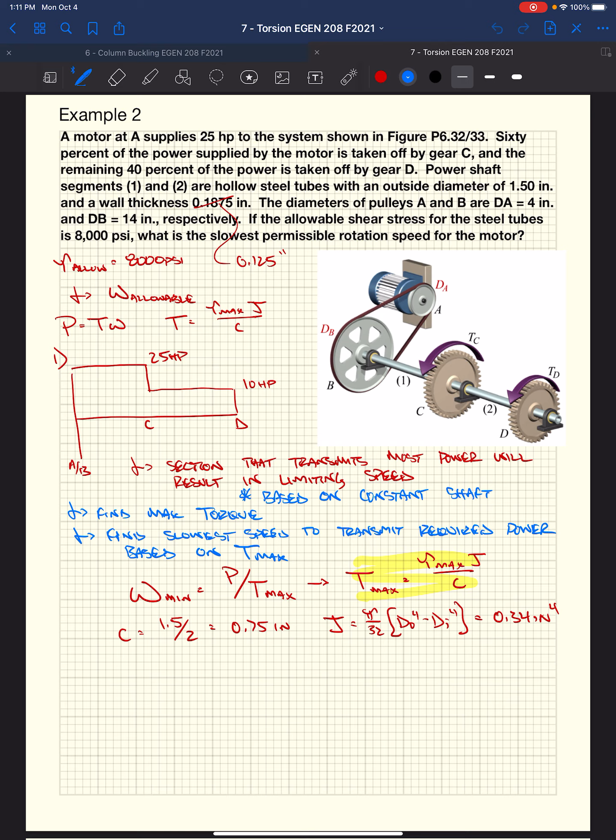Okay, so to pick up where we left off on Friday, we had this motor. It applied 25 horsepower to this shaft system that drives 2 gears. Each of those gears is taking power off of the shaft system. The first gear, gear C, took 60% of the power, or 15 horsepower, and the last gear takes off the remaining 10 horsepower. They asked us, what is the slowest permissible rotation speed for the motor?

So we went through, given our two expressions relating torque. We have our torque to stress relationship, T equals tau max times J over C. And then we have power equals torque times rotational speed, omega. Based on rearranging omega, we can get this equation: power divided by the maximum torque equals the rotational speed.

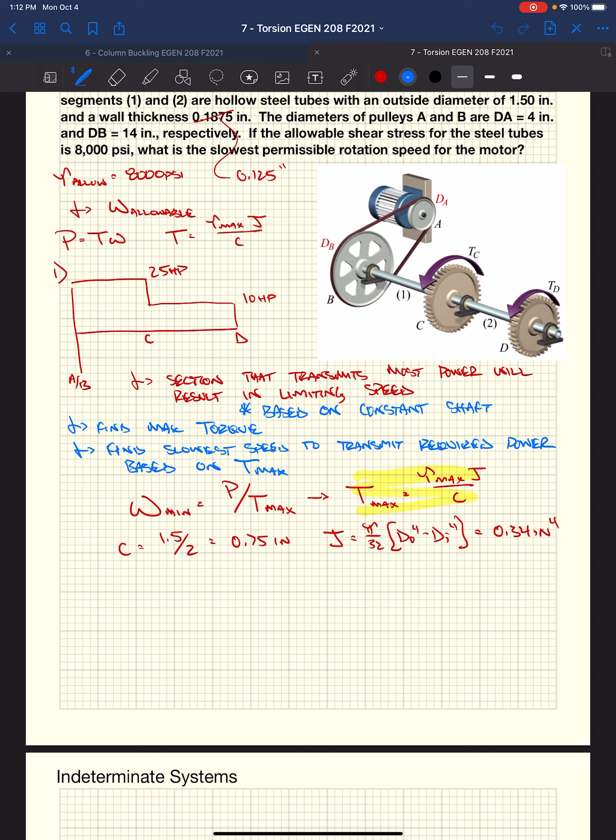Well, if that torque is limited, like in our case, our allowable shear stress for the steel tubes is 8,000 psi. So they're limiting how much torque we can apply to the system. If they're limiting the amount of torque we apply, and we're given the amount of power supplied, we're essentially given a requirement as to the rotational speed.

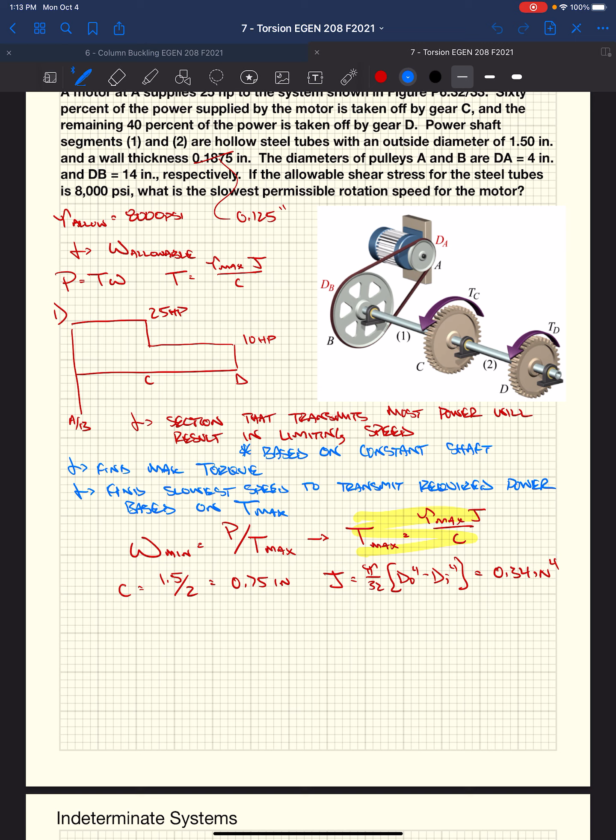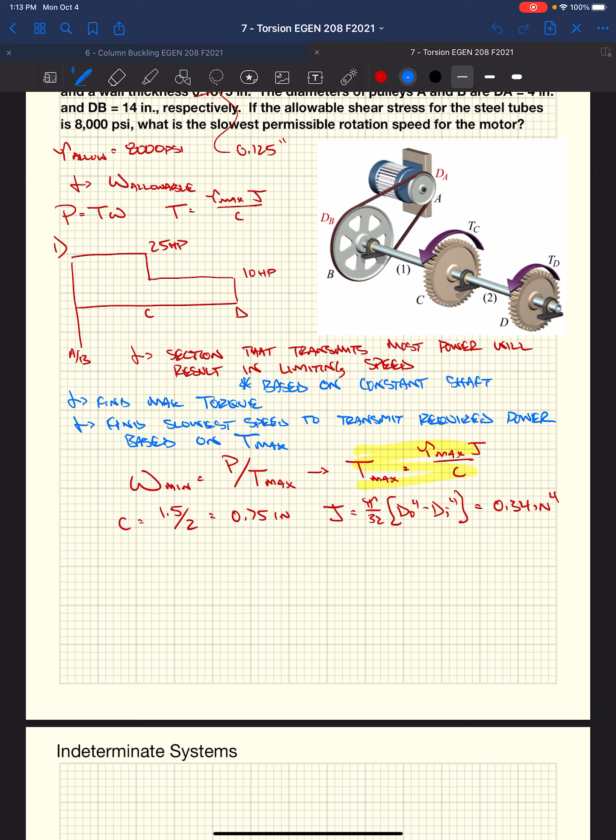What's the slowest permissible? So in order to do that, we need to calculate the maximum torque first, which is our maximum shear stress times the polar moment of inertia divided by the max radius. We calculated max radius and our polar moment of inertia. Now we can go through and calculate what our maximum shear stress or maximum torque is.

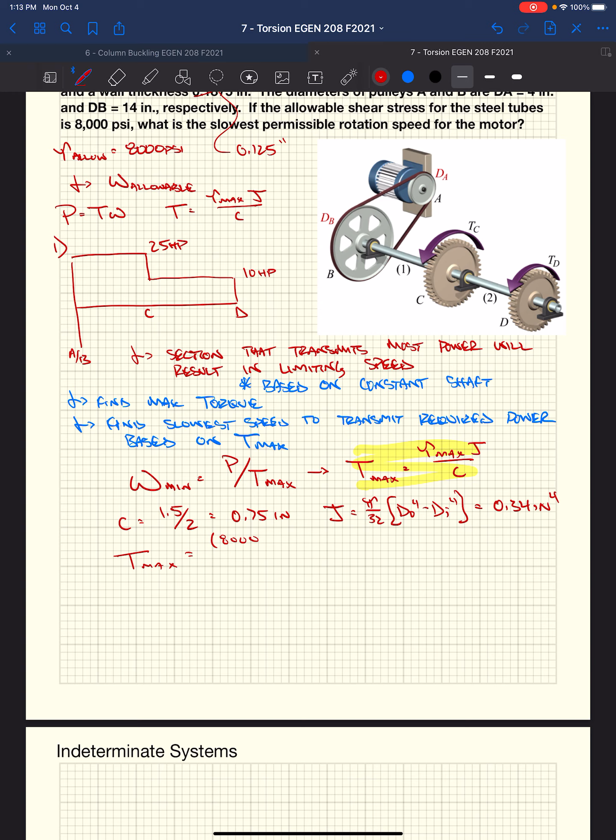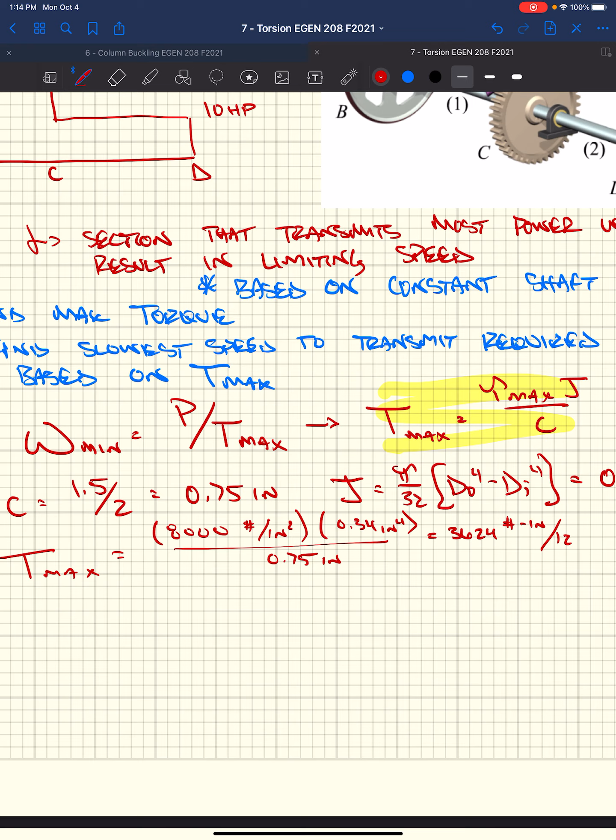8,000 pounds per square inch, times J, which is 0.34 inches to the fourth, all over the radius, 0.75. Our units work out to be 3624 pound-inches. I want to make it feet, so I divide by 12, inches per foot. So we get this max torque equal to 302 pound-feet. Our max torque is 302 foot-pounds.

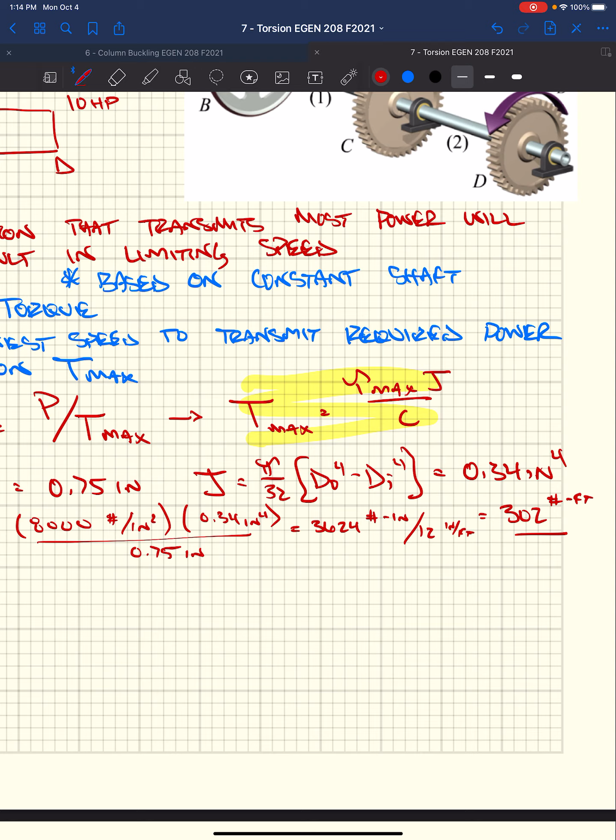Well, now that we have our maximum torque, and we know how much power we need to deliver, we can now calculate our omega equals power over max torque. Power we're given in horsepower. We know there's 550 foot-pounds per second per 1 horsepower. We're going to divide all this by the maximum torque.

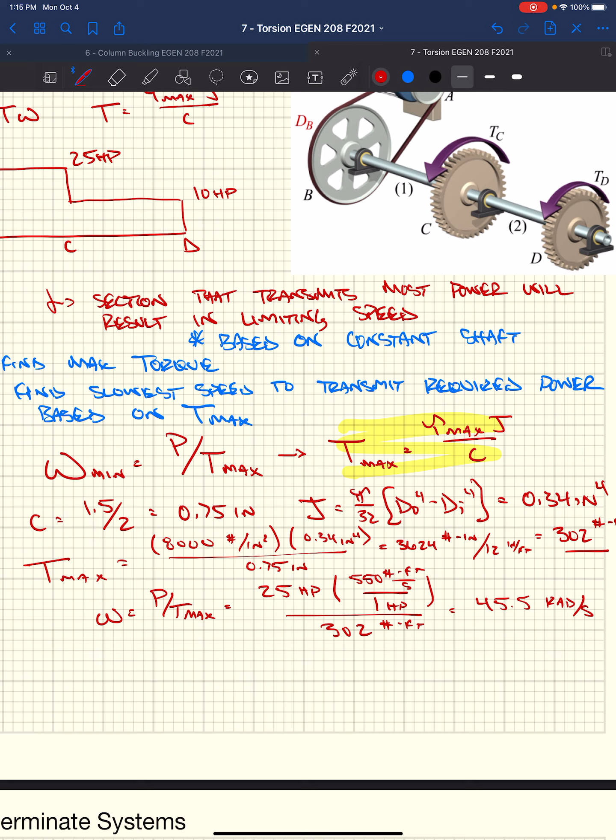And we get our answer in radians per second. Horsepowers cancel, foot-pounds cancel, we get essentially 1 over seconds, unitless over seconds, or radians per second. They wanted to know our revolutions per minute. What is the slowest permissible rotational speed for the motor?

Well, this is the slowest rotational speed for the shaft, because that's what's dealing with torque. And so we've got omega equals 45.5 radians per second. 1 revolution we know is 2 pi radians. We have 60 seconds per minute, and we get our typical rotational speed units of revolutions per minute, or RPM: 435 RPM.

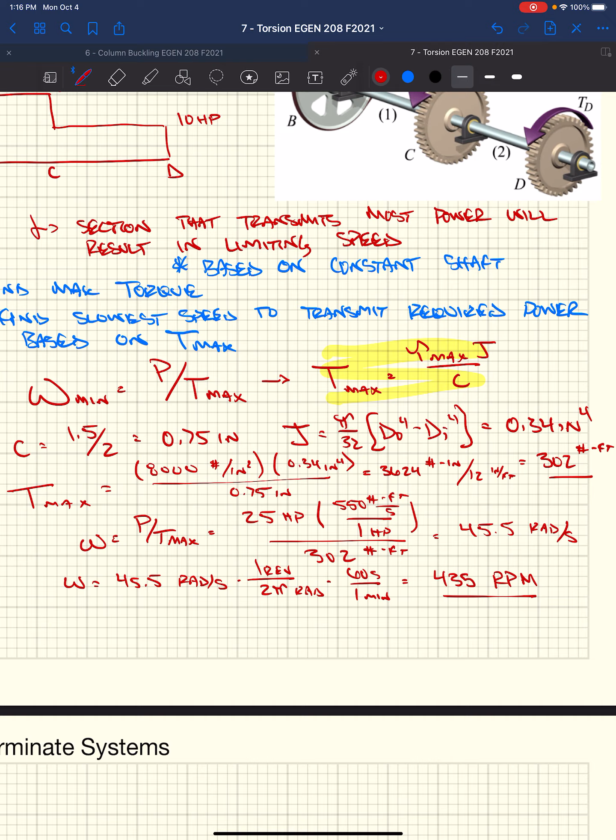So if we want to ensure that we don't exceed the maximum shear stress of the shaft, and we provide enough horsepower, that being 25 horsepower into shaft 1, we've got to rotate this shaft here at 435 RPM in order to get that without exceeding the max torque. But we want to know, how fast does the motor have to spin? Because we have this gear ratio going on here.

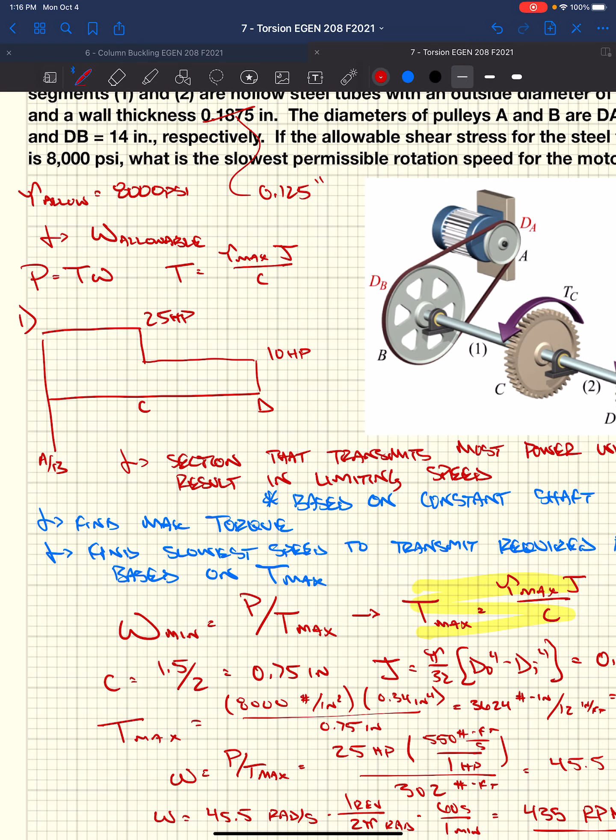Well, the RPM of the motor equals the rotational speed of shaft 1 times our gear ratio. So in our case, with speed, the gear ratio flips. So now we're looking at 435 RPM times the diameter of the shaft's pulley divided by the diameter of the motor's pulley, and we get the RPM of the motor needs to be 1,522 RPM.

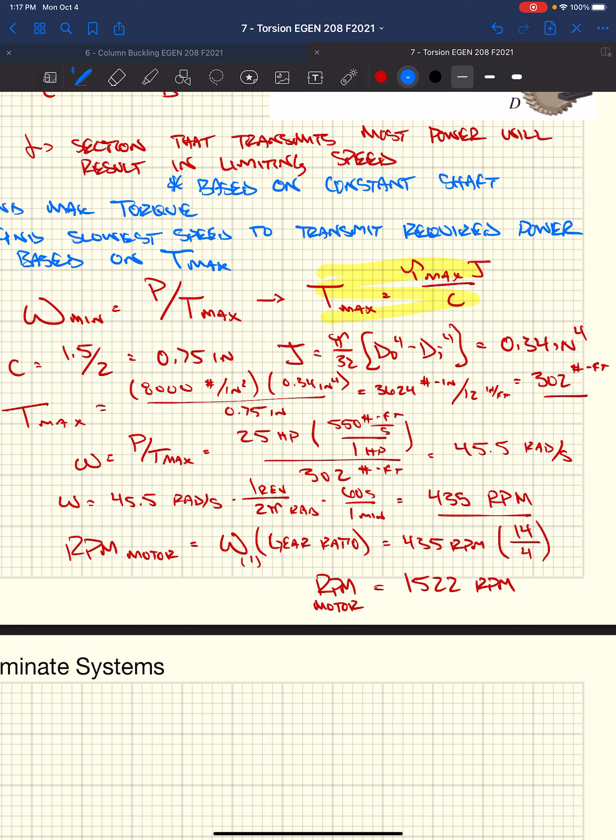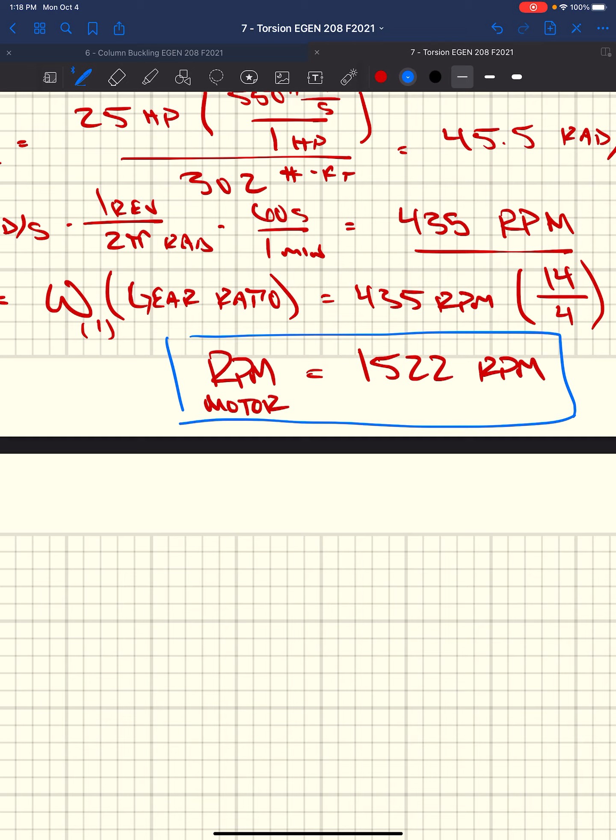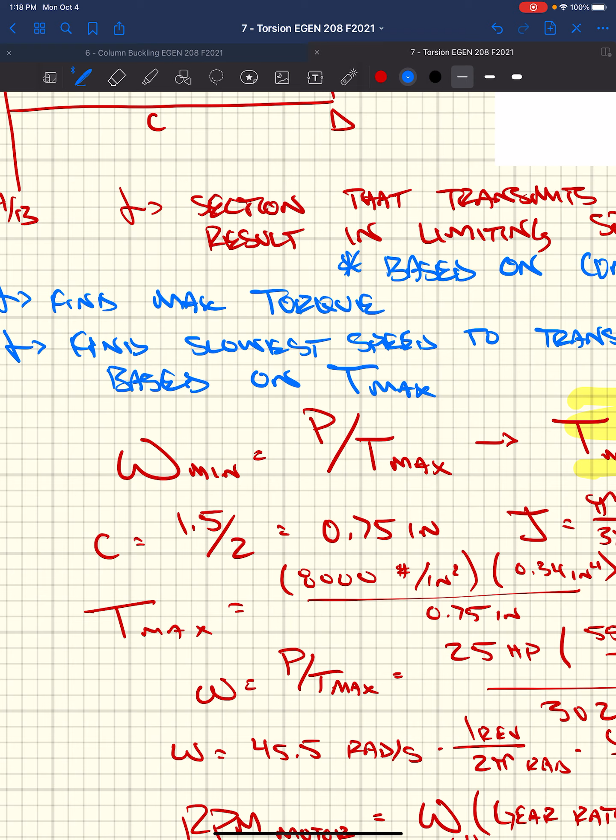Does that make sense? A lot of moving pieces here. Anything less than that, and we're not going to provide the power required.

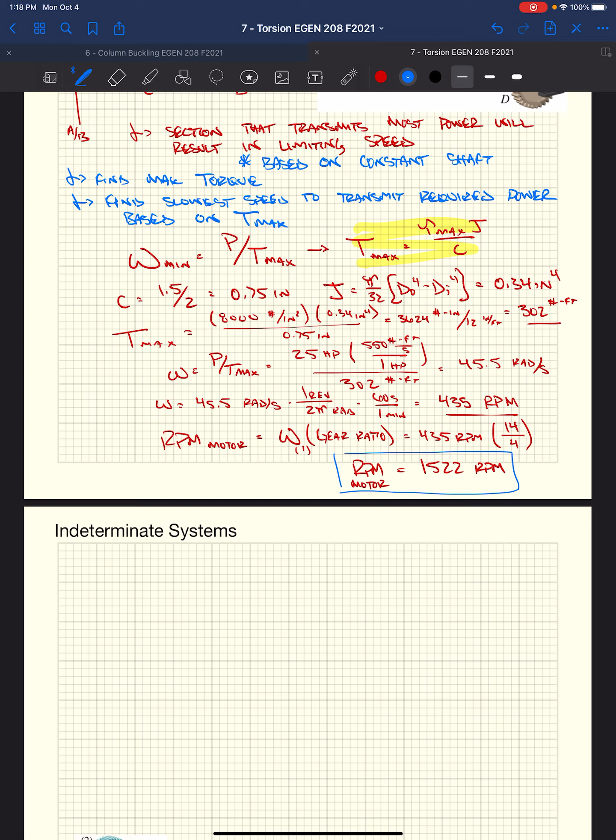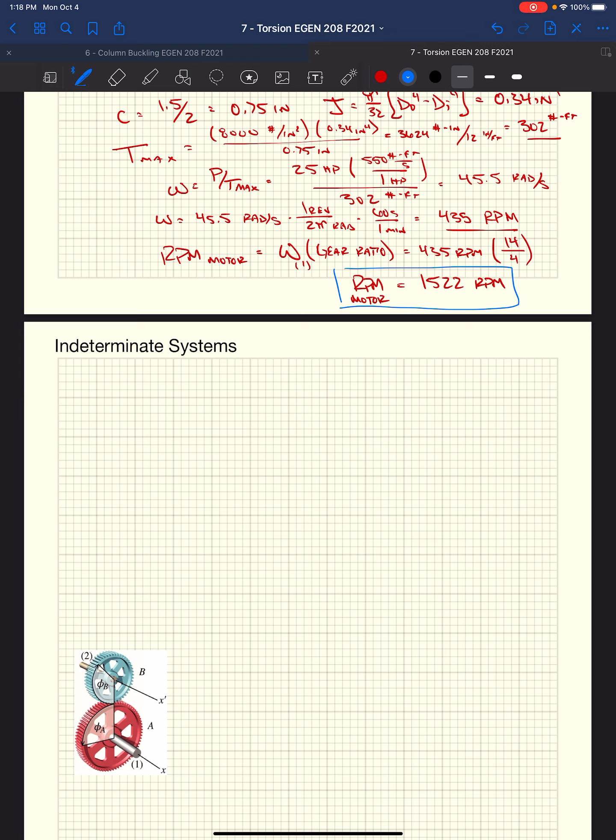Well, just like with axial systems, we have indeterminate systems with respect to torsion too. Indeterminate systems go through a process to devise a solution. But indeterminate just means that there are more unknowns than equations of equilibrium.

Our equations of equilibrium do not allow us to calculate forces when there are more unknowns than equations of equilibrium. We have some of the moments and some of the forces.

If we're looking at true, pure torsion systems, ignoring some of the gravity aspects, we really only have one equation of equilibrium: the sum of the moments along the axis of the shaft. That's where all the forces are acting, along the axis of the shaft. So if we have a system that has two unknowns in it, then we have an indeterminate system. And we determine if it's indeterminate through the same process as we went through with axial forces.

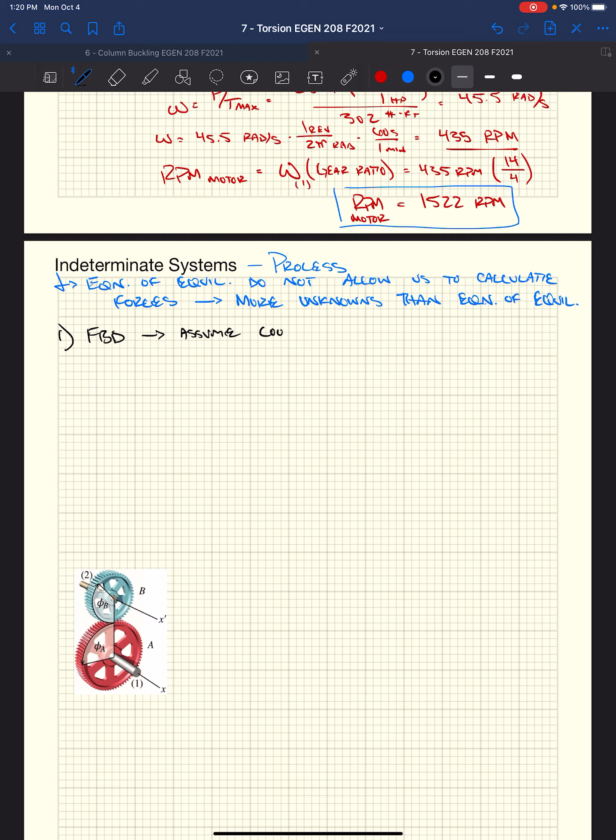We start with our free body diagram. This is where we assume coordinates and find an expression where sum of the moments equals 0, or sum of the torques essentially, since torque is a moment. So in this case, we're assuming a coordinate system along the axis of the shaft, one direction or the other. And then we just sum moments about that axis, and that has to equal 0.

If we have one unknown and we sum moments, we're going to be able to solve for our unknown, and this would be a determinate system. If we have more than one unknown, then we're going to need to continue down this process path, where we develop additional equations that relate forces and deformations so that we can then have an additional equation and solve for our forces. So if we do have an indeterminate system, we need to now assess or determine

how a system will deform.

With axial systems, one of the relationships was, and you had a homework on it, where we had the rigid bar connected with a bunch of different axial members. And if the bar rotated, we could come up with a relationship between the deformation in one rod versus deformation in another. Another one is if we had those rods in series between two fixed plates, we could say that the deformation of all the rods has to equal 0 because it's between a fixed set distance. The other one is if we had two materials glued together, but they both extended between two plates. So if one material extends, the other one's got to extend, because they're connected together.

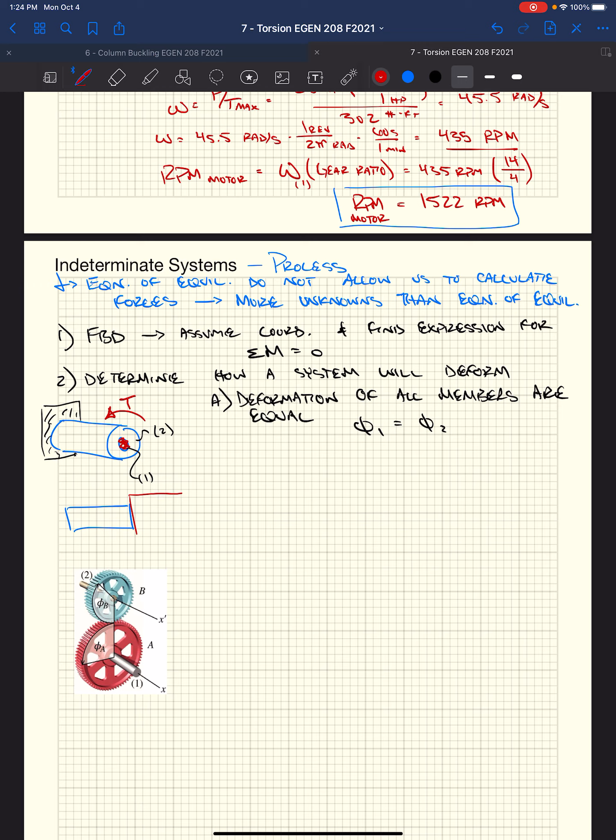We can have another one, similar to the axial indeterminate systems. With torsional indeterminate systems, you might have two different rods or shafts, different materials, between two fixed ends. You apply a torque in the middle. Our total deformation in this case equals zero.

If the supports can't rotate, we apply torque at the center here. These shafts are going to rotate the same, but in opposite directions. So the total deformation, or the total twist, of that system has to equal zero.

Well, we also have gears or pulleys in torsional systems. So we can come up with angular relationships of deformation - A rotates proportionally to B.

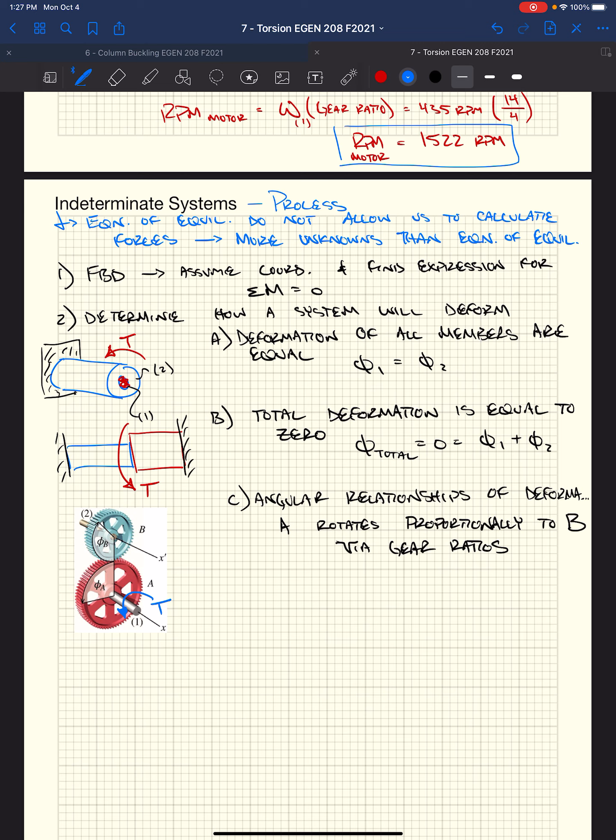So we take these relationships, and now we can relate force and deformation. This is essentially our torque-twist relationship, very similar to what we did in axial members with FL over AE - we're relating force and deformation.

Well, we have an equation that relates twist with applied torque: TL over JG. So now we can take this force-deformation relationship and plug it into the deformation relationship that we determined from the overall system. That would be step 4.

So we get to combine steps 2 and 3, so that the geometry of deformation is expressed using forces. This is called compatibility - the geometry of deformation is expressed using forces.

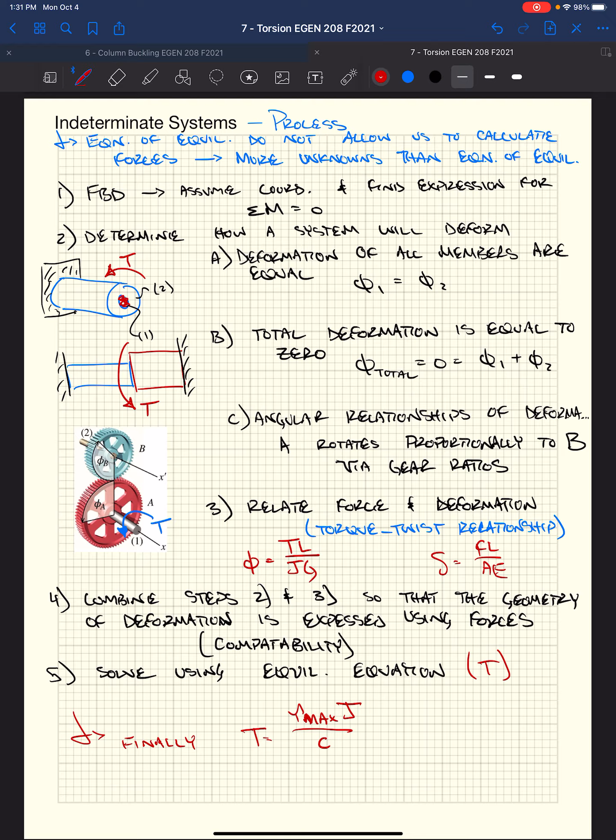This additional equation, which relates deformation with respect to applied torques, is going to give us the ability to solve for a torque in terms of another. Take that, plug it into our moment equation, and we can solve for all of our internal forces, or torques. Finally, from there, we can use our equation for maximum shear stress, based on our polar moment of inertia, our maximum radius of our shaft, as well as the applied torque.

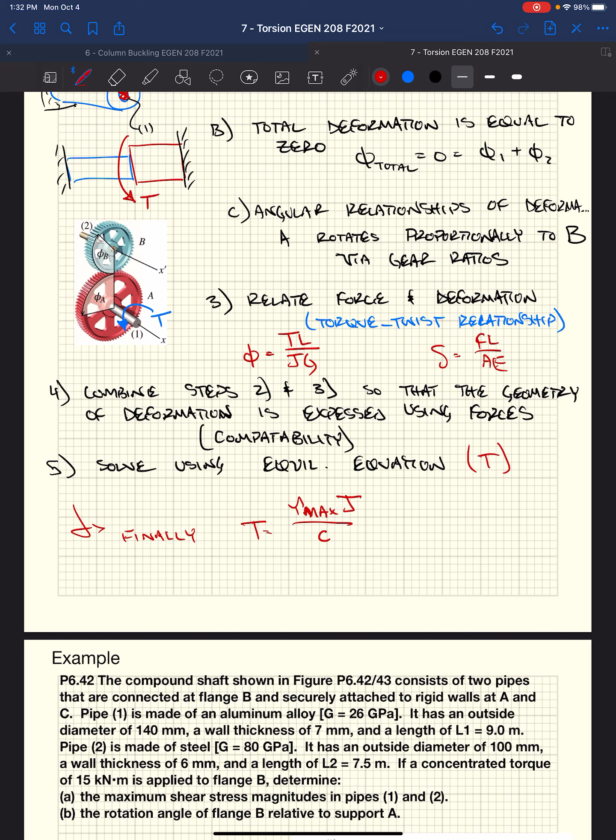Quick question - so we use C to denote the maximum radius, is that for if we have, say, a tapered shaft? Is that why we do that, or why isn't it just R for radius? So C is just denoting the max radius, it's just the way the nomenclature works. I mean, that's a very good point, I don't know why they wouldn't just use R. Yes, was it, you used rho to determine further? Yes, distance out, but then when rho equals R, that is C. Makes sense, right?

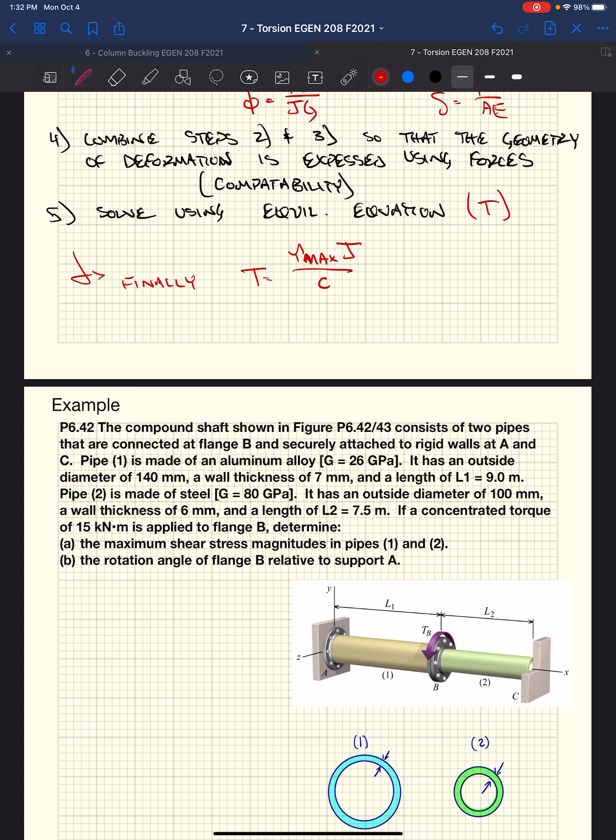Okay, obviously we're going to go through an example. The last torsional - well, that's not true, we're going to go through stress concentrations first - but we have an example.

We have two pipes, rigidly connected at both ends. That means there's no rotation at A and C, the extremes of our two pipes. Pipe 1 is made of aluminum and pipe 2 is made of steel. They give us the shear modulus for each, which is good to know.

They give us the dimensions of each pipe. Our aluminum pipe is 140 millimeters in diameter, maximum diameter, with a thickness of 7 millimeters. The steel pipe is 6 millimeters thick, and the maximum diameter is 100 millimeters.

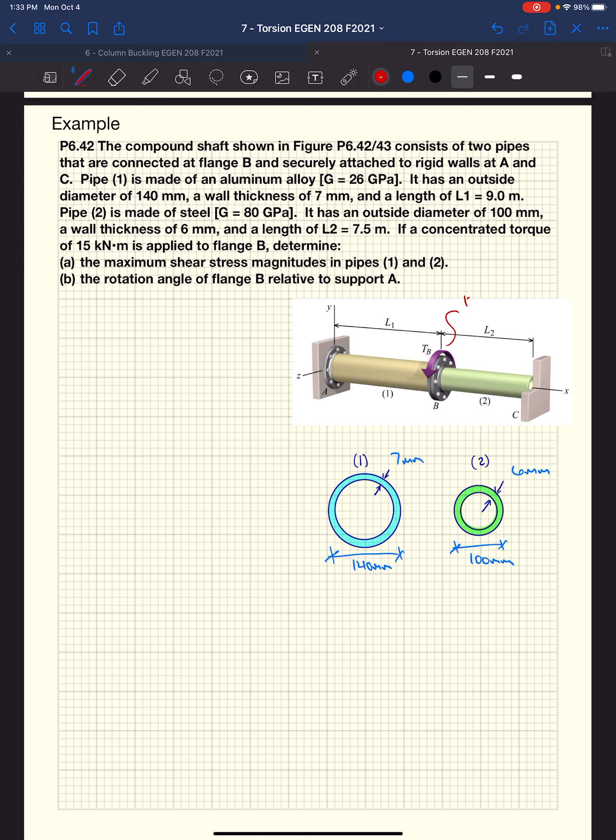They say we have a concentrated torque, TB, applied at the flange, the connection between the two pipes, of 15 kilonewton meters.

They ask us for a couple things: one, what's the maximum shear stress in each of the two pipes? And two, what is the rotation angle of flange B relative to support A? Essentially, how far did this flange rotate with respect to the ends?

The solution would be, one, starting with a free body diagram. If I decide to draw a free body diagram, I'm going to cut out that middle section and take it out. We really want to know the internal torques.

Internal torque allows us to calculate our maximum shear stress. It also allows us to calculate our deformation or twist, how far each of those shafts will twist. So I really want to know what the torque is inside each of those pipes.

If I draw a free body diagram that depicts each of those torques, say we have our flange connection, with our aluminum pipe off to the left, which is a bit larger in diameter than our steel pipe. We need to assume coordinates — I'm going to assume positive x to the right.

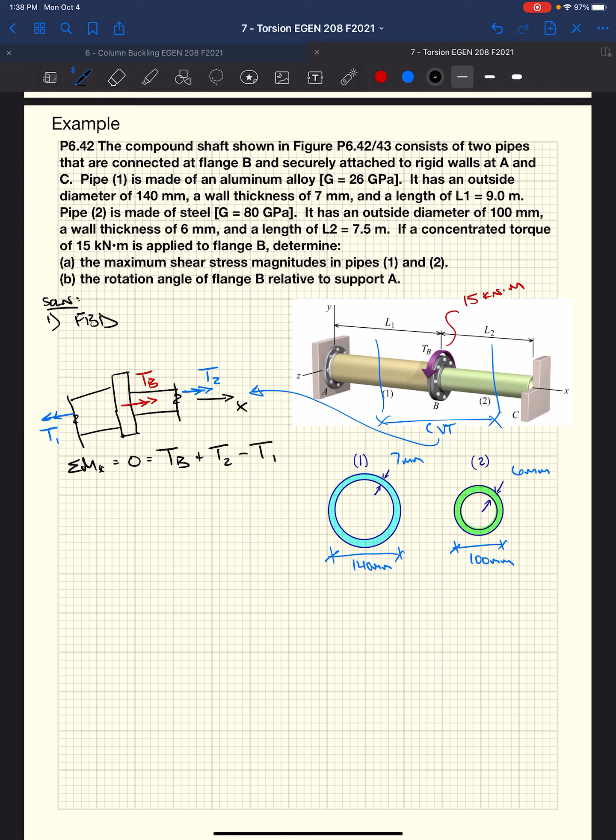We have one additional unknown beyond the equations we have. Summing moments in the x direction gives one equation, and we have one known value, the torque at B. We don't know the torque in each shaft, so this is indeterminate to the first degree — one additional unknown beyond our available equations.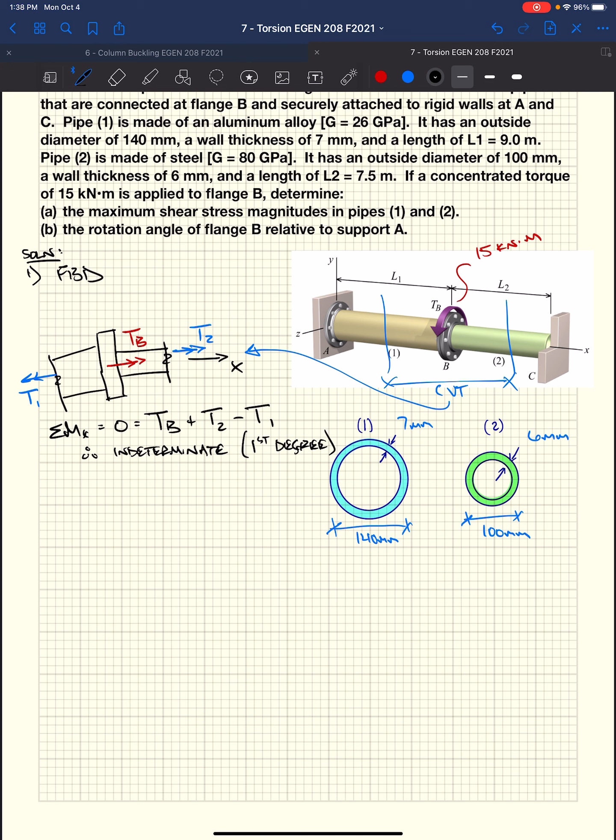So being that it is indeterminate, we need to assess the deformation. That is step 2.

Working through the deformation assessment, out of the three different relationships I presented, there's the proportional relationship, which is gear ratio driven — no gears or pulleys here. There's parallel systems or systems in series, where parallel means a shaft within a shaft. We don't have that.

So we have this system in series, where we have fixed supports at both ends that won't allow these shafts to rotate at the ends. That means the shaft rotation of 1 has to equal the shaft rotation of 2, or: 0 equals the twist at 1 plus the twist at 2.

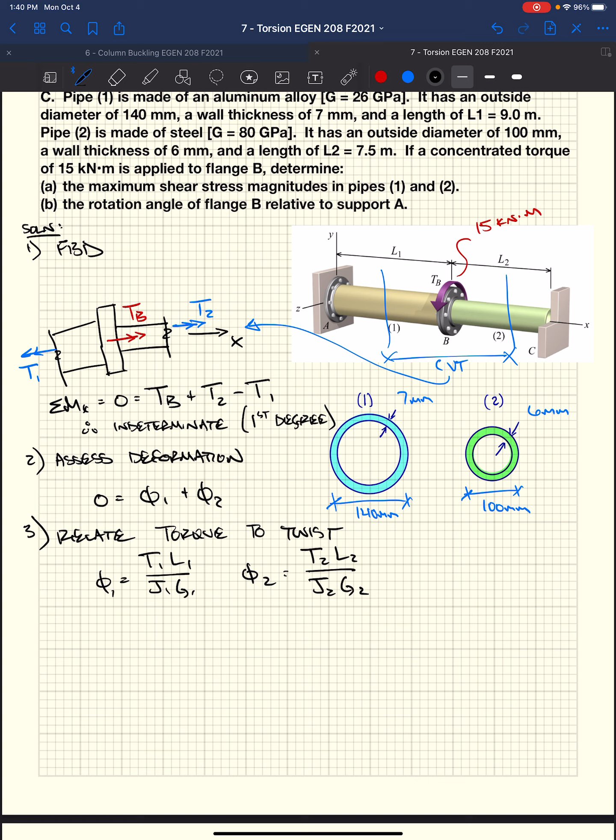Now we need to relate torque to twist. We do that through our torque-twist relationship. So we have T1, L1, J1, G1 is the rotation at 1, right? Deformation of 2 is the torque at 2, the length of 2, polar moment of inertia of 2, and the shear modulus of 2.

Well, we have everything we need to calculate 3 of those items in each of those. We've got the lengths, we've got the polar moment of inertias we can calculate, and they gave us the shear modulus.

So if we start by calculating our polar moments of inertia, pi over 32, outside to the 4th minus inside to the 4th. I'm not going to bore you with all of that, this gets incredibly tedious. So essentially 140 millimeters minus 126 millimeters to the 4th times pi over 32, and you get that. Polar moment inertia of 2.

Same thing, it's a pipe. It could be a solid steel shaft. All that would change is our polar moment inertia. In this case, because it's a smaller diameter, it has a smaller resistance to twist, smaller stiffness to twist.

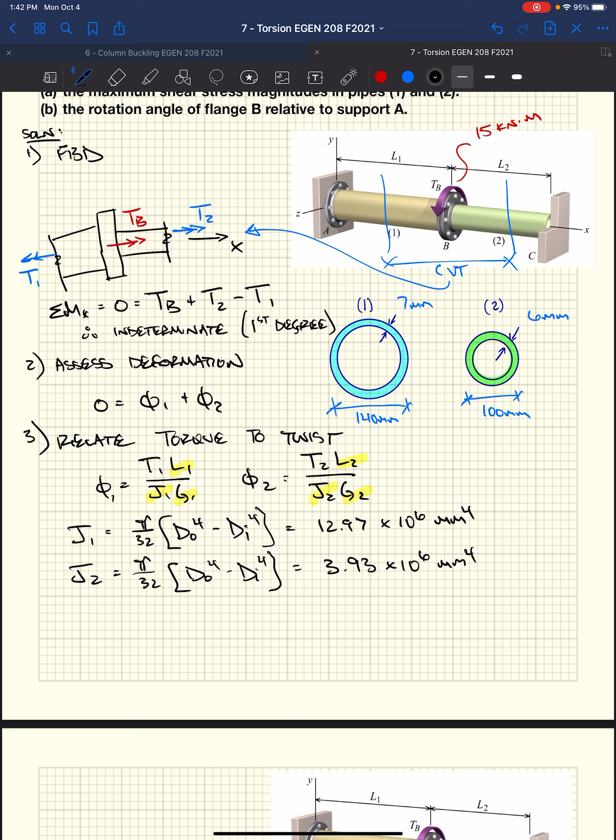So if we start by, so we get a little cross-eyed here, 4. So we want to combine 2 and 3. Well, if we do that, we're essentially saying that the twist at 1 plus the twist at 2 equals 0, or T1, L1, J1, G1 plus T2, L2, J2, G2 equals 0.

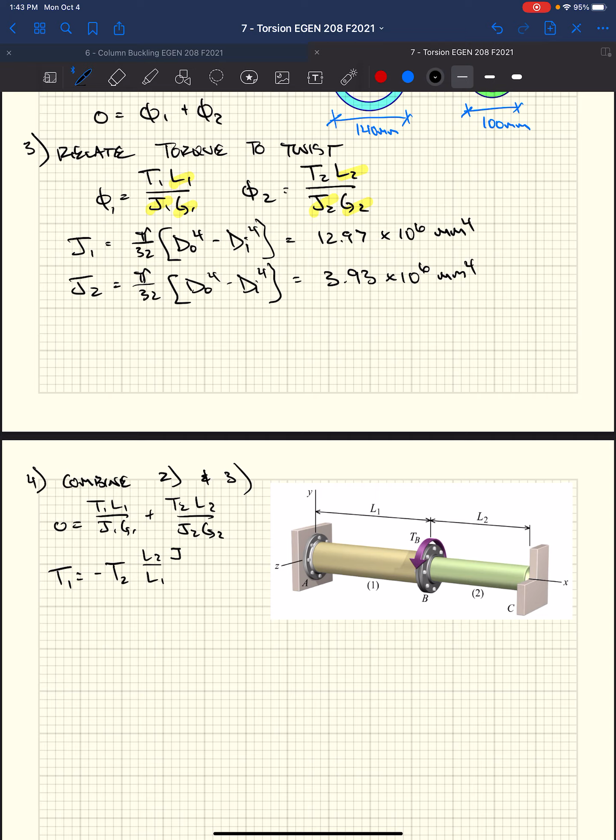Well, we can rearrange that equation to give us something in terms of one of the torques. 2 equations, 2 unknowns. We're going to solve one equation for the other unknown, take that and plug back into the original equation. So I chose to rearrange this for torque 1. You could as easily have rearranged it for torque 2. So I said torque 1 is negative torque 2, L2, L1, J1, J2, G1, G2.

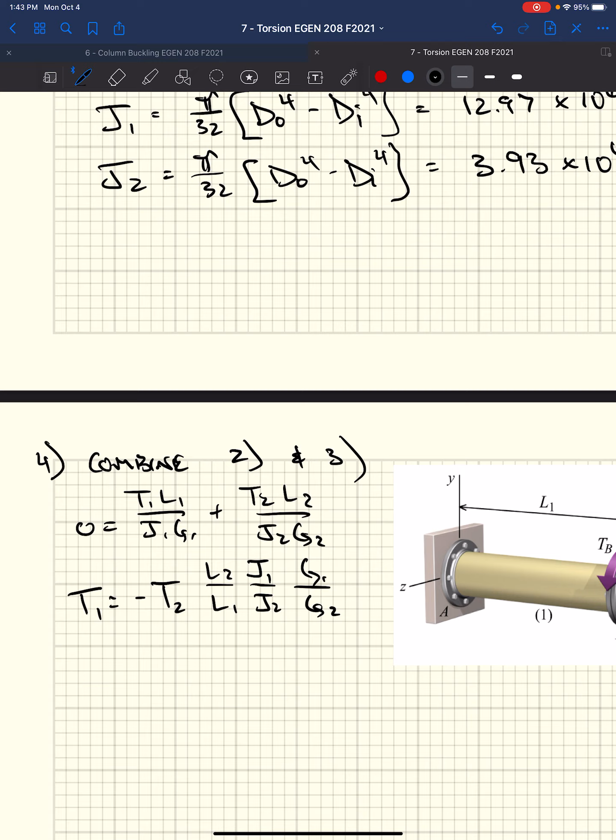All right, that's our expression. We have everything to the right of torque 2. We have our length of our shafts, we have polar moment of inertia for each of the shafts, we have the shear modulus for the shafts. I'm not going to bore you with all of that, but you essentially just need to input all of those

values, and when you do that, you land with an expression that says T1 is minus 0.894 T2.

So using our relationship for deformation, saying that the deformation has to equal 0 as we move from one side to the other because these ends are fixed. That means the deformation of shaft 1 plus deformation of shaft 2 has to equal 0. Doing that, plugging in our torque-twist relationship, we essentially establish this expression. That's the relationship of torque 1 with respect to torque 2.

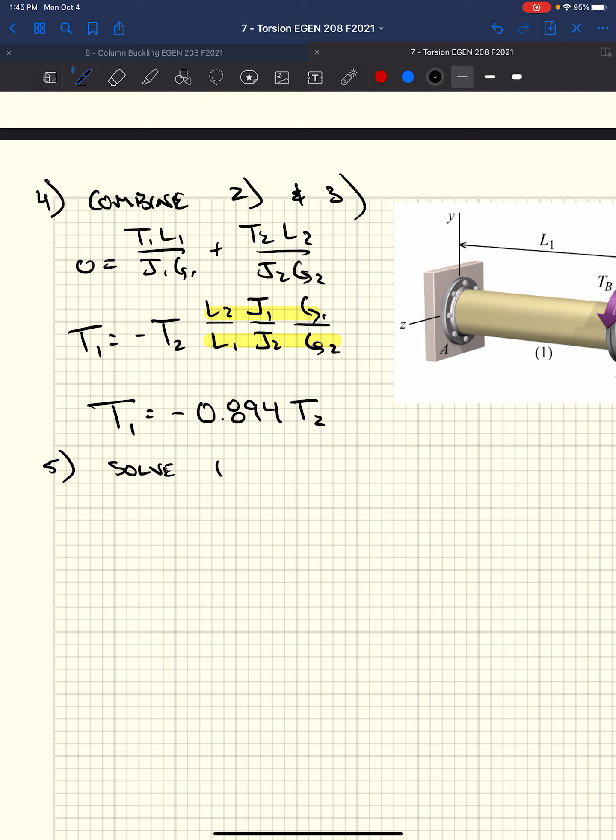Now, we can go back to our equilibrium equation. We have an expression of T1 in terms of T2. We can replace T1. So we get sum of the moments about the x-axis we know is 0. We decided that it was the torque at B plus the torque at 2 minus the torque at 1. Or we can rearrange this and say that torque at B equals the torque at 1 minus the torque at 2.

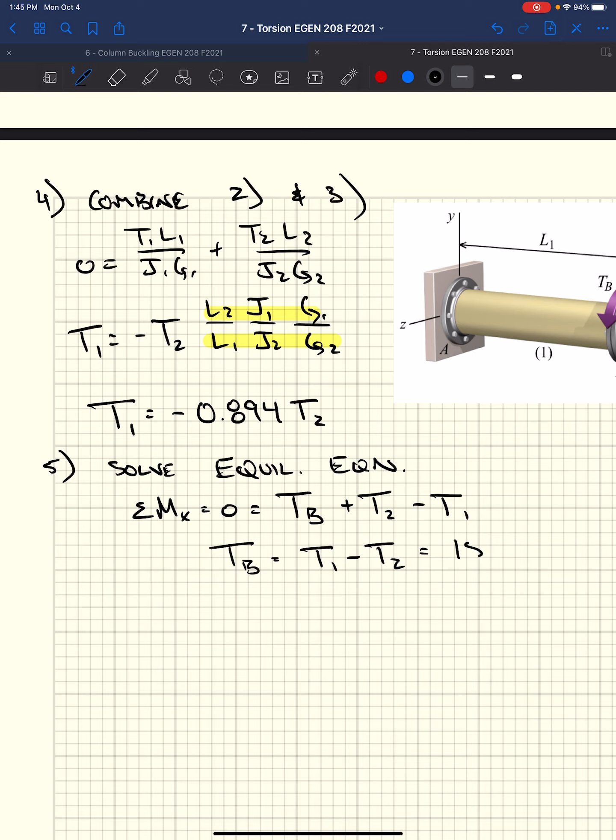We know the torque at B they gave us was 15 kilonewton meters. And we also know that torque 1, well, that's negative 0.894 torque 2. I'm going to place that in there. I'm going to rearrange this. I'm going to say 15 kilonewton meters equals negative 0.894 torque 2 minus torque 2.

What's that mean? Well, we have negative 1.894 torque 2 equals our 15 kilonewton meters. Well, if we divide 15 kilonewton meters by negative 1.894, we would get that the torque in shaft 2 equals negative 7.92 kilonewton meters.

And if we plug back into our equation up above, saying that T1 is negative 0.894 T2, we get 7.08 kilonewton meters.

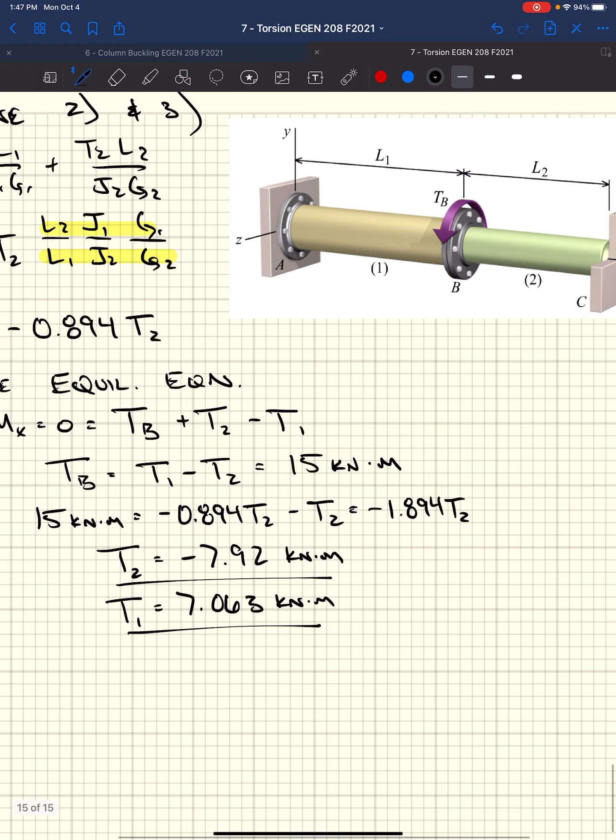Yes, Brendan. So do these still have compression and tension? Like the sign, so we have a negative torque, yeah, but that doesn't mean compression, right?

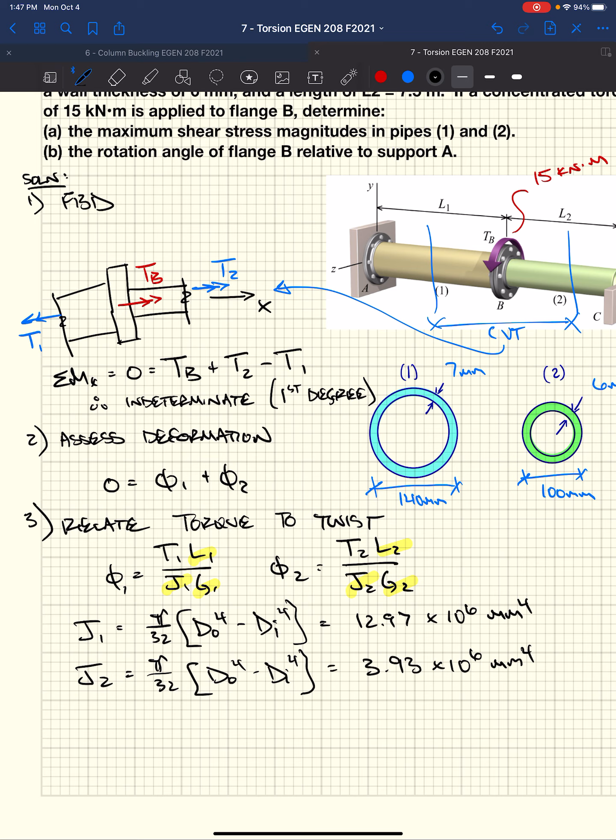So I was just about to mention the fact that when we did our equilibrium equation, we assumed a sign convention that said T1 was negative because it acted to the left, and T2 was positive because it acted to the right. Well, now we've just established what direction each of those go by our outputs here. It says T2 is negative 7.92 kilonewton meters.

So what does that mean? Well, T2 actually acts in the other direction, which makes sense. If you looked at this and you applied a torque in one direction, both the steel and the aluminum pipe are going to resist that, right?

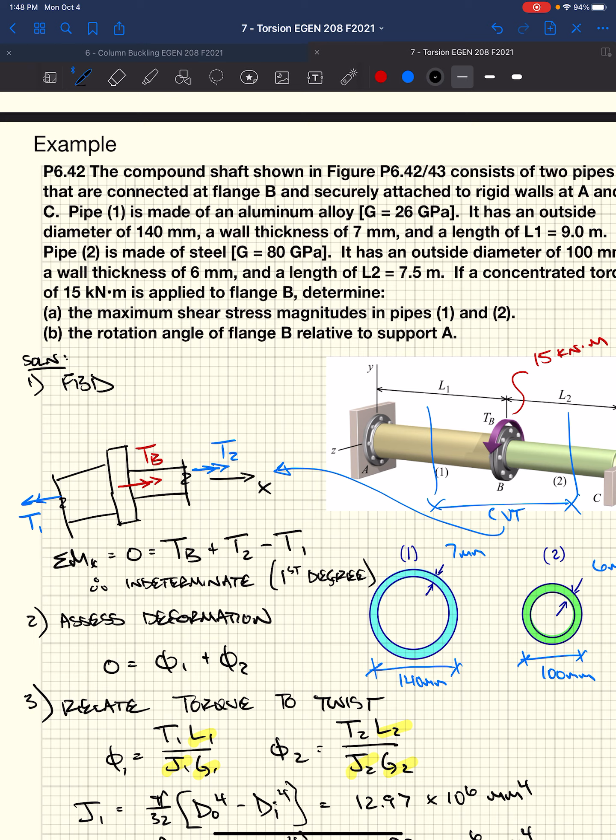I did this to show you that the output you get is going to establish the direction of these internal torques, with respect to the assumed sign convention that you started with when you developed your free body diagram. Which makes sense in our case because it's saying that T2 is actually acting in the opposite direction.

Does that help you out, Brendan? Mm-hmm. Yes. So in this case, because T2 acts in the opposite direction that we drew it, it is actually a negative torque because it's into, it would be, the arrow should be pointing into the...

Correct, correct. Yeah, so essentially because outward normal is positive, right, the sign convention for torque, so these two are essentially positive torques, but because we just calculated that T2 acts in the opposite direction, this torque is technically negative, right?

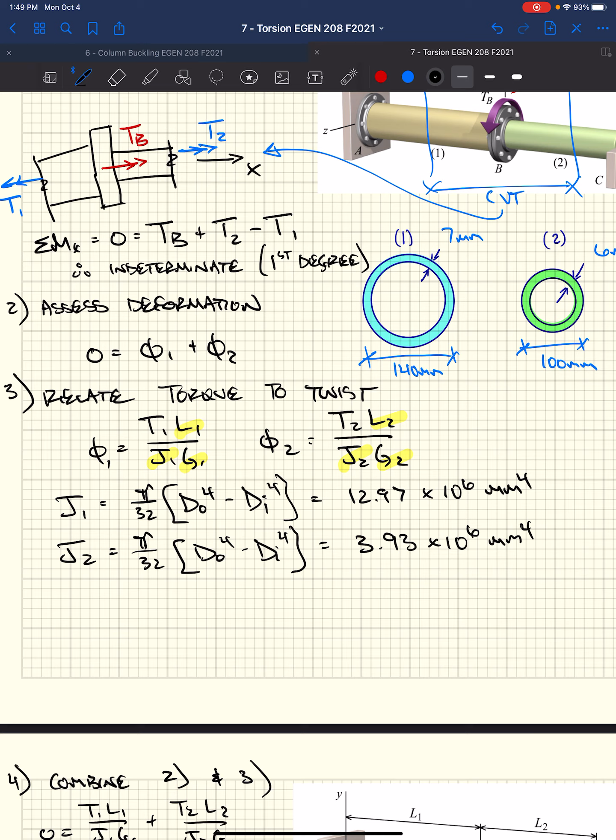It is going to rotate the shaft in a negative direction because it is a negative torque. It's kind of confusing, trying to separate the free body diagram from the actual torque, okay?

So now that we've established the magnitudes of our torque and the actual directions that they act, we can solve for part A, which was asking us what is the maximum shear stress in each of these two pipes.

Well, we know that the maximum shear stress is based on the applied torque, our max radius—they love to call it C for some reason—and so that's a function of the geometric properties of the shaft and the applied torque in the shaft.

In our case, we've got tau one equals T1 C1 over J1. I'm not going to bore you with the rest of this, but I get 38.2 newtons per millimeter squared.

Right, this is a megapascal. Remember to keep your units consistent. If our torques came in kilonewton meters, we would need to convert it to Newton millimeters. Max radius we should have in millimeters, and then J's already in millimeters.

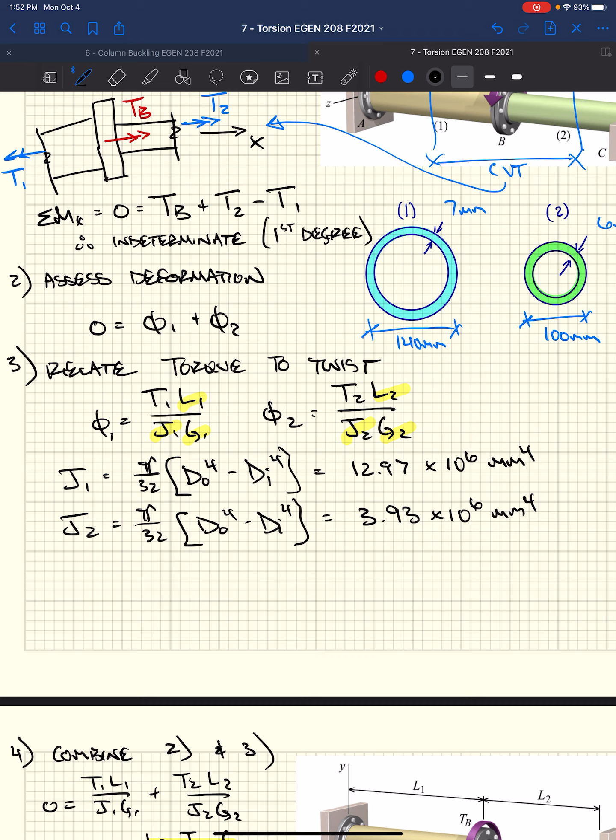J becomes a big driver in this. If we look at the two polar moments of inertia of our two pipes, well, the aluminum pipe one is about 4 times—3.5 times—as much as our steel pipe. So that denominator drives that stress way up in the steel pipe because it's not as stiff. Because it's not as stiff, our stresses go up.

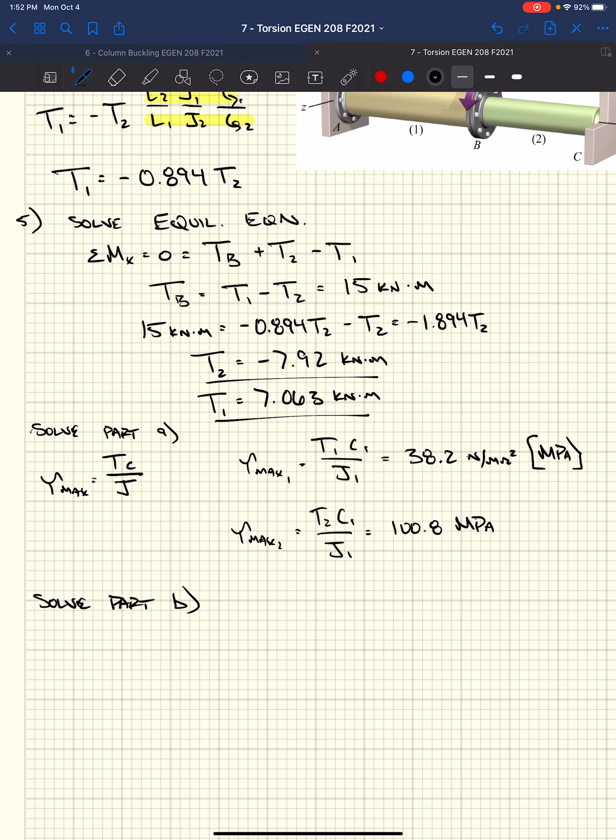Now if we go through and we solve part B, they asked us how much, with this applied torque, did this flange rotate with respect to plate A?

Right, we have this torque twist relationship now. We have torque 1, and we have all the other geometric parameters. We get 0.189 radians, okay?

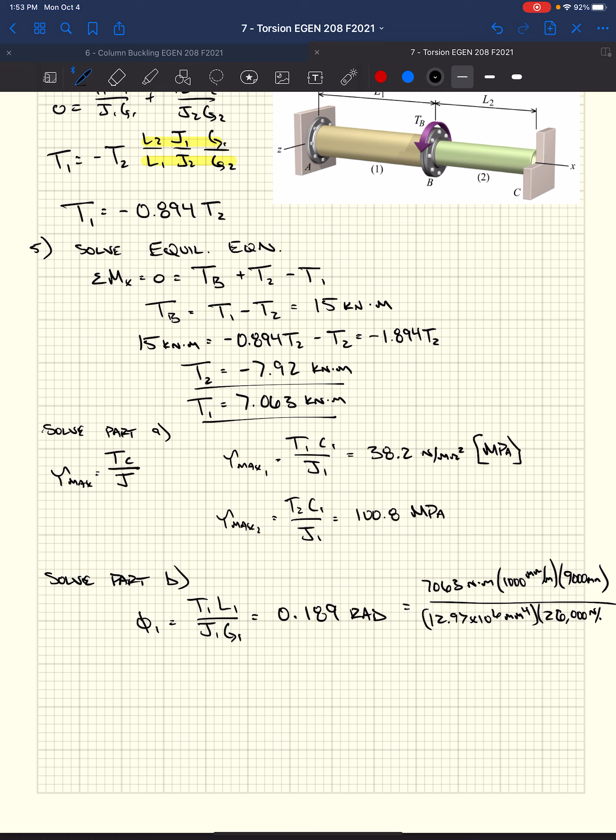This would be 7063 Newton meters times 1,000 millimeters per meter times 9,000 millimeters, because it was 9 meters long. Then we have 12.97 times 10 to the 6th millimeters to the 4th. That was our polar moment of inertia of shaft 1, and it was 26 gigapascals, which is 26,000 megapascals, which is 26,000 newtons per millimeter squared. That way all of these units cancel and we end up with just radians, okay, unitless.

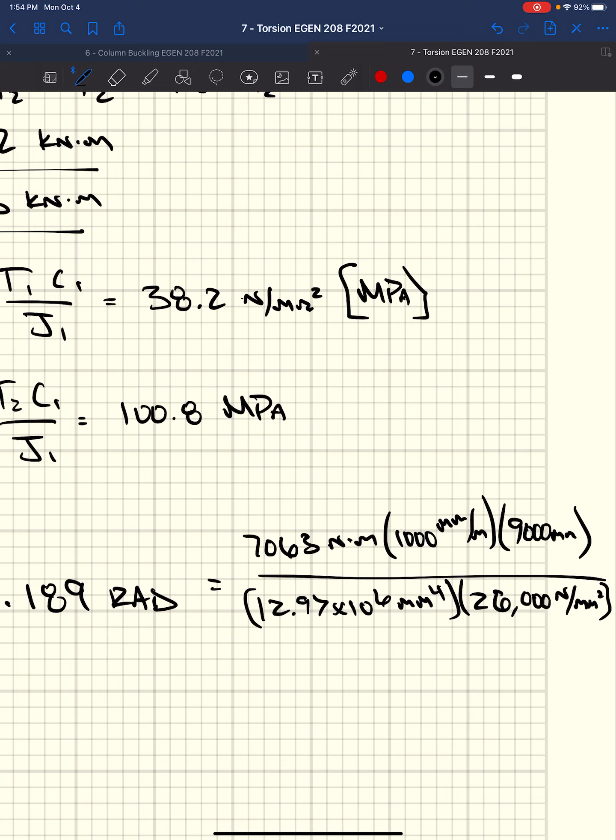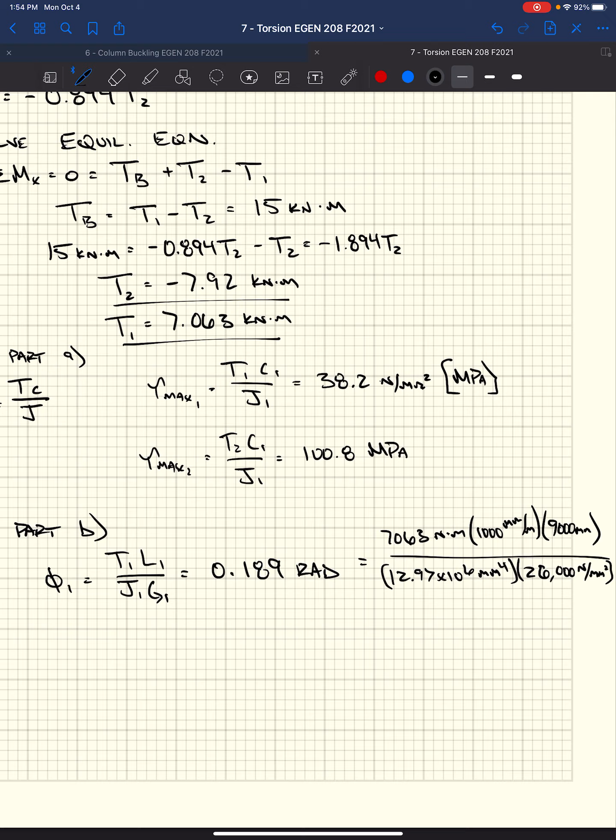This is a positive radians, right? 0.189, because our torque is positive, because it's outward normal, T1 outward from the face.

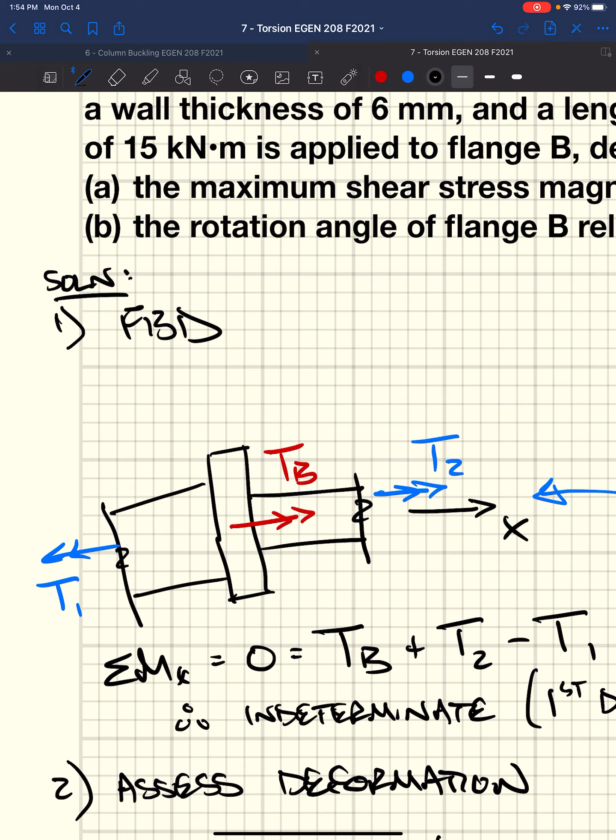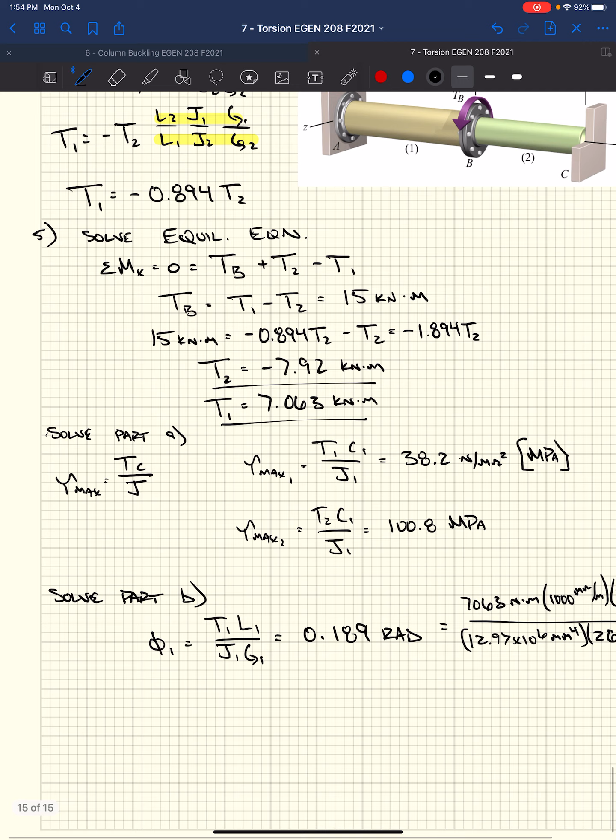So it has a positive rotation. If we were to calculate the deflection of shaft 2 at this point, we're gonna come up with the exact same answer, but it's gonna be negative, right? So if we went through and put in T2, L2, J2, G2, we're gonna get negative 0.189 radians. Which if we went back to our original deformation relationship, right, that relationship holds true.

Because the torque is now negative, because it's acting towards the face, rotation is negative. So when we add the rotation of 1 plus the rotation of 2, we get 0. This should check out because this is one of the bases we used to calculate the torques in the first place, right? It's the relationship we used.

Any questions? What's that? Kind of needy, aren't you?

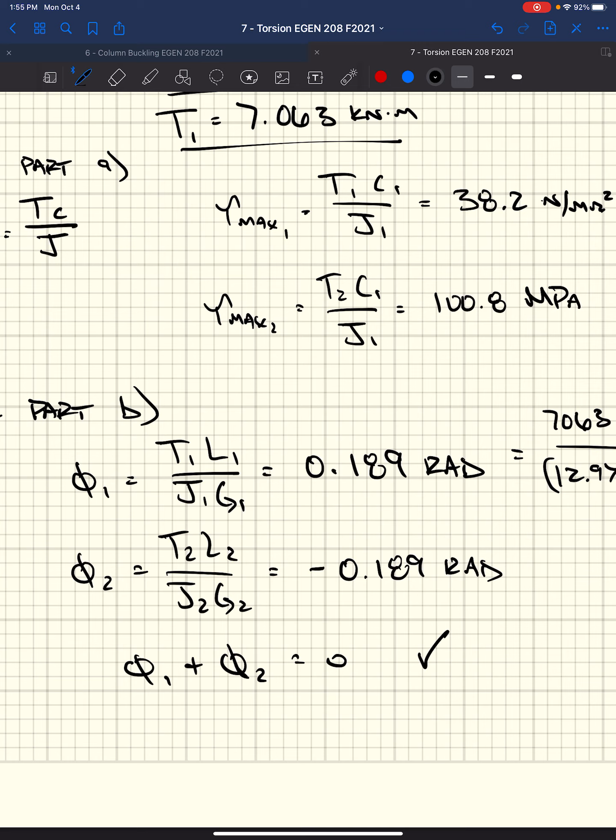Units. Rotations in radians is unitless. All of these should cancel out. Up above, you should land with some sort of stress. Stress would be megapascals or pascals, right? Newtons per millimeter squared or megapascal. So you want to make sure your torque is in Newton millimeters, your max radius is in millimeters, and your polar moment of inertia is in millimeters to the fourth.

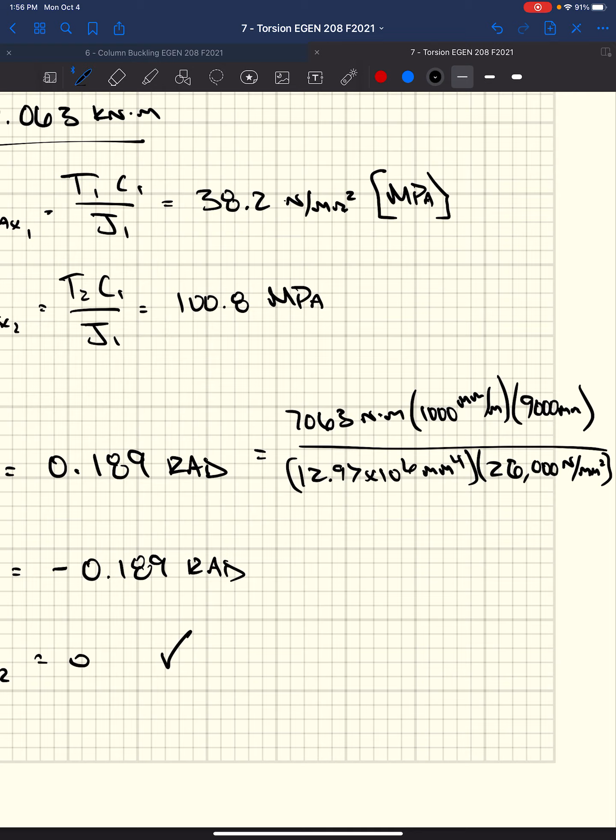All right, we're going to step away from this torque, at least, and get back to axial, which torque and axial loads, right, are similar. They're acting along the axis of a long, slender member. We're going to talk about stress concentrations. I already started talking about these earlier in axial, but I wanted to wait until we got torsion done.

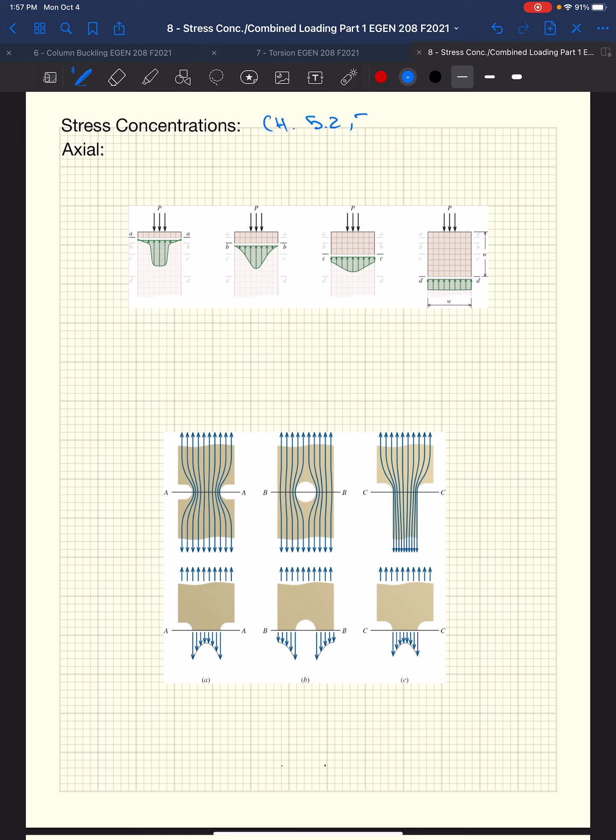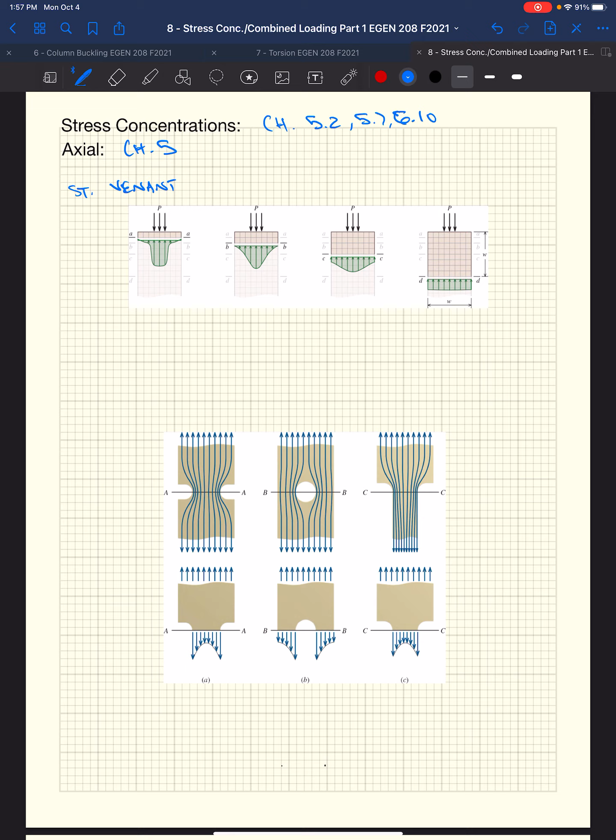So in the book, this is chapters 5 and 6 in those sections, right? Axial is chapter 5. We have this principle called St. Venant's principle. We talked about it briefly during axial loads. And really the basis was, after we discussed, we had a concentrated load on a long, slender member, okay? We're going to have some localized stresses that happened at the applied force, right?

Makes sense, okay? If you were to put like this piece of rebar, okay, and you put a nail on the top of it, okay, and you put 10,000 pounds on that nail, right at the surface where the nail is driven, right, you're going to have a lot of stresses right around the nail head, okay, right, or nail tip. And then as we work our way down into this piece of rebar, right, those stresses will slowly dissipate, or not dissipate, but spread out, okay?

And St. Venant's principle says that once you get to essentially the depth of the width of that cross-section, essentially, once you get into your cross-section the same distance as the width of the cross-section, you've essentially established a uniform stress, right? That's where we can use our uniform tensile stress. It's force over the area, and the area we use is the total area of the cross-section. So as you imagine for this rebar, if you put something in the center of it, it doesn't take very long until you're looking at a uniform stress across the entire piece of rebar, right?

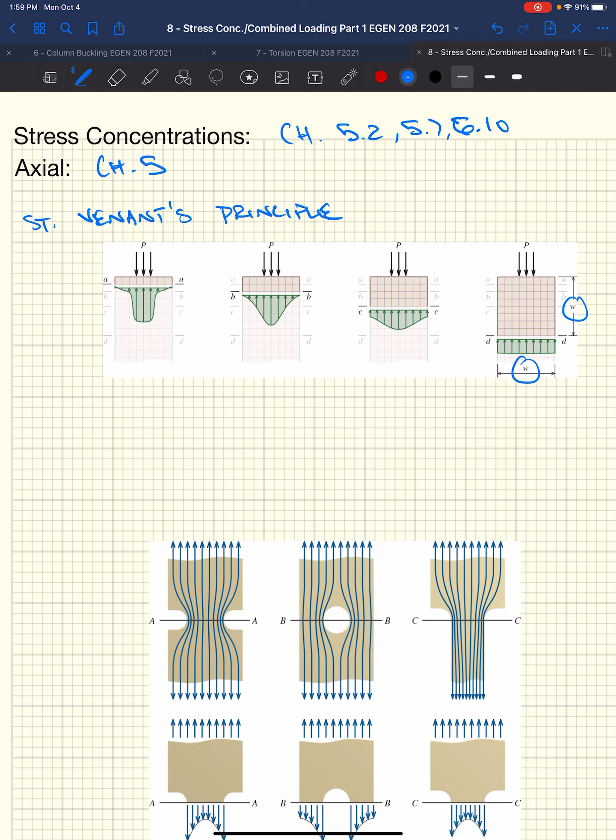Well, that's where we have applied forces. Well, if we had, say, a piece of steel plate, see what we can find over here, okay? Say this is steel and not plastic, okay? And we decided to drill a bunch of holes in it. We might decide to put some notches in it in order to make it fit in the situation or conditions that we have for it, okay?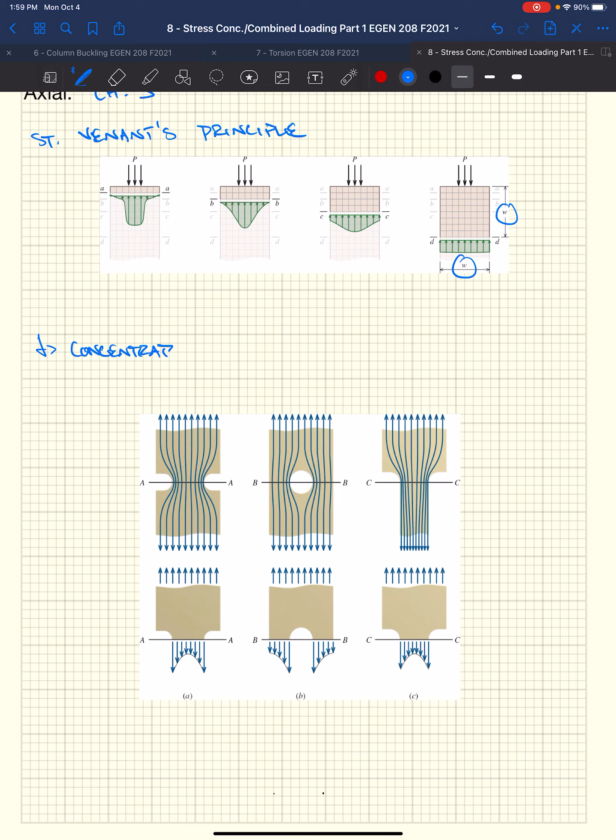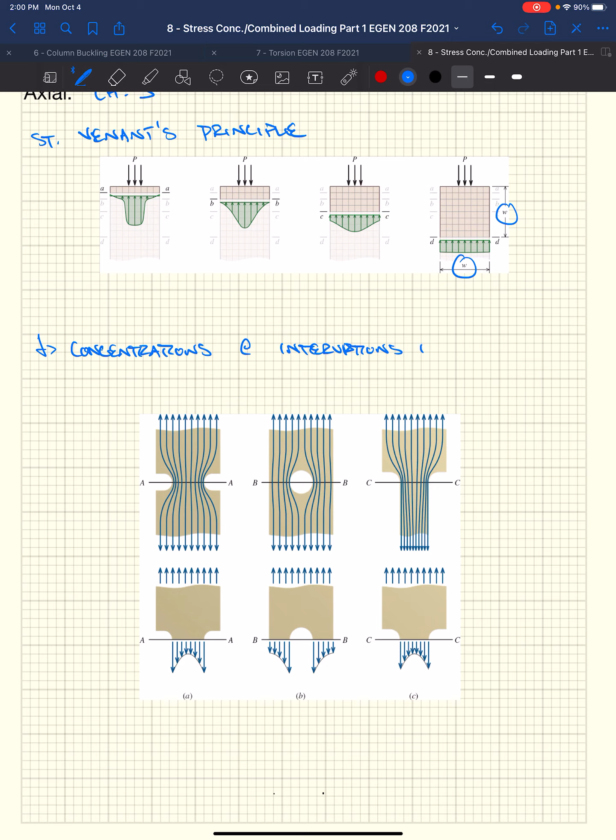Those stresses, as they travel through - so now we're not looking really at the ends of the member, but something happening through the length of the member, okay - our stress has to essentially travel through that discontinuity. It's got to go around the hole, around the notch, or through some sort of pinch. And so we get concentrations at interruptions in our stress path.

So you can imagine each one of these lines is what they call a stress trajectory, okay? And those stresses are parallel to our normal stresses. And so we'll talk about it on Wednesday on how the moving of these stresses, right, compressing them, driving them around the discontinuity increases our stresses in our member.